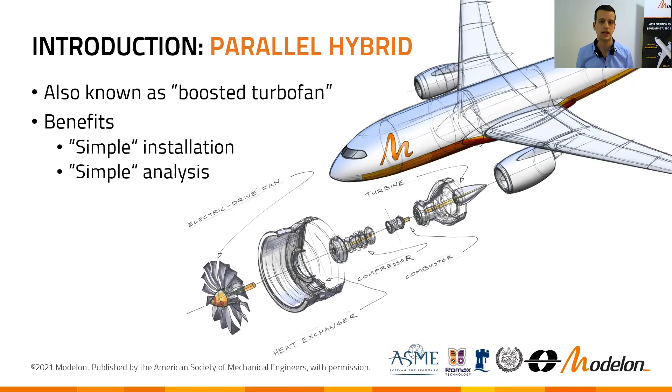The benefit is that the concept is still relatively simple in comparison to some of the other ones, and is therefore also relatively straightforward to analyze. Now, 4 variants were discussed in the literature of these parallel hybrids, and the first one here applies electric boost during the mission phases in which the aero engine must provide peak powers or peak thrust levels in relation to the cruise conditions. And these are the takeoff and to some extent also the climb conditions.

And in these cases, the hybrid system draws power from batteries on board the aircraft. And therefore, it's possible to downsize the thermodynamic core to yield some of the key benefits. And this is actually the most widely used concept of operations. Second, one could also apply electric boost during cruise. And some people see benefits in this, but there is also a lot of skepticism because of the weight of the required batteries. The third concept of operations shuts down the gas turbine core during taxi and spins the fan

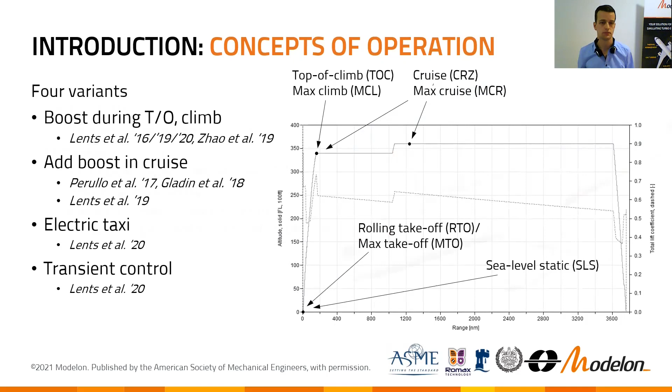with the electric machine. The fourth and last concept installs electric machines on both the high pressure and the low pressure spool and uses these for transient control, in particular to modulate the surge margin. And in the following, we will be focusing on the first option. So let's talk about the methodology then.

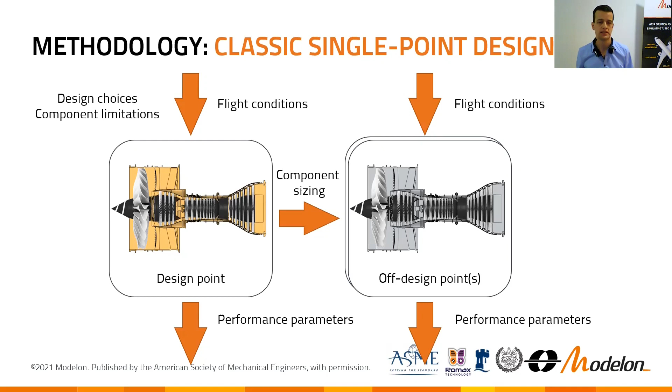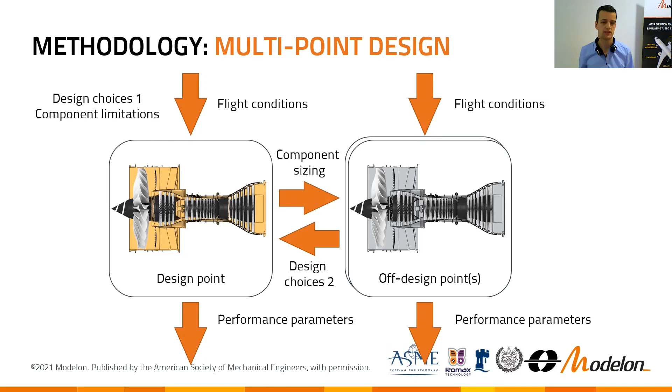This slide illustrates the classic single point design. And as most of you know, a single design point is used here to define the sizing of all the components. And then any number of off-design points are simulated to yield the performance estimates. Due to the limitations of the classic approach, we use multi-point design here. And in this case, design and operation rules allow off-design points also to be used to define the sizing on the design point. We therefore get this additional information flow from the right to the left. And it becomes possible to define some design choices based on key off-design points.

In this multi-point paradigm, we use the Kyprianidis and Zhao scheme. It's fairly unchanged. And to study the shaft speed, we vary the specific thrust of the hybrid. And this is a key cycle parameter for propulsive efficiency. And a low value typically goes hand in hand with a low fan pressure ratio and a high diameter fan that reduces the losses in the wake of the engine and therefore leads to more energy efficient designs.

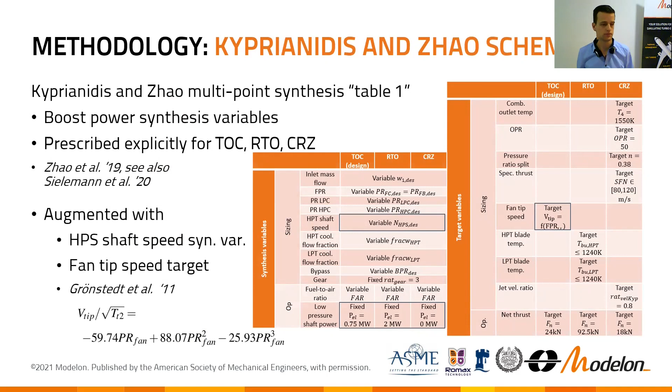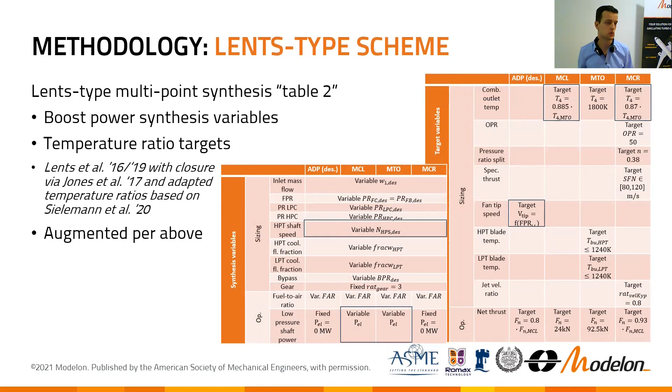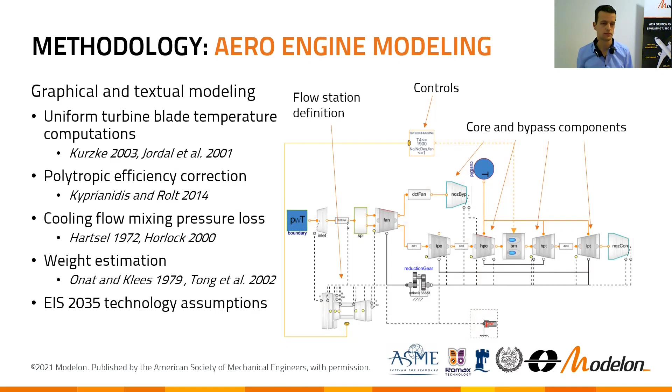When we're building multi-point design models, these models, as we just saw them, can be instantiated several times. Typically, that happens once for design and several times for off design. And these engine model instances are then connected to each other through additional utility models that contain the typical design and operation rules.

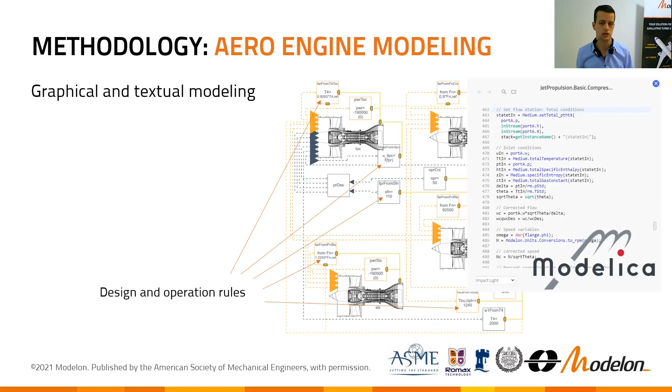Thanks to the standardized Modelica modeling language, all the graphical and textual representations of the model are always consistent. And we can also open up the code editor in the environment to read and change the code by hand anytime.

Now, if we want to yield an integrated simulation in design, we also must include some physical models of the electric power system. And these can be introduced through these placeholders. Behind that, we can have different variants. And by replacing the placeholder with a particular variant, we drop in just the right model detail. In this case, the electric machine, the cables, the inverter, batteries, and so on.

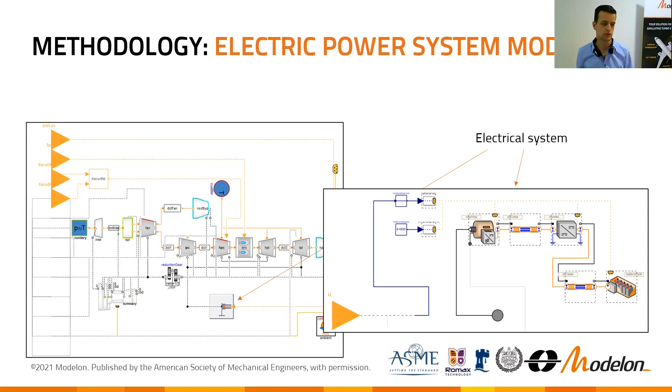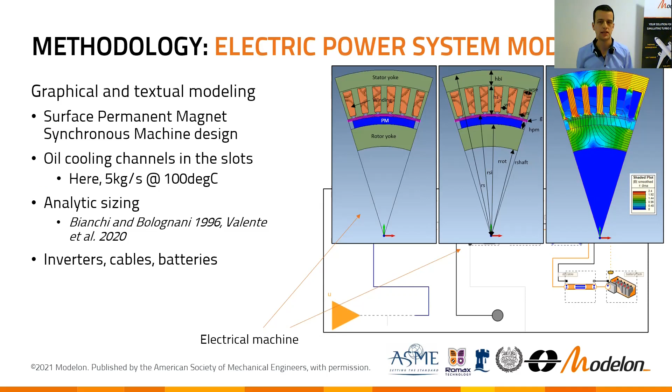Lastly, we can also review some of the geometric dimensions used in the analytic design procedure for the electric machine. And as you can see here, we assume a permanent magnet synchronous machine design and a certain constant cooling flow in terms of oil, 5 kilograms per second across all the designs that we're looking at. And the references on the slide provide some more detail on this analytic sizing procedure that I mentioned.

All the computations were run in Modelon Impact, the system simulation platform that offers multiple views and means to access modeling and simulation. And on the slide to the left, you see the graphical desktop with your drag and drop functionality and these custom functions or microscripts that can be used to automate workflows interactively.

In the middle, you see the notebook interface in which you can mix code, text, graphics, outputs, plots, etc., to build up sophisticated analyses and workflows. And to the right, you see your custom web apps and browser-based dashboards providing interfaces to sophisticated simulation. And in this work, we use the two views shown to the left.

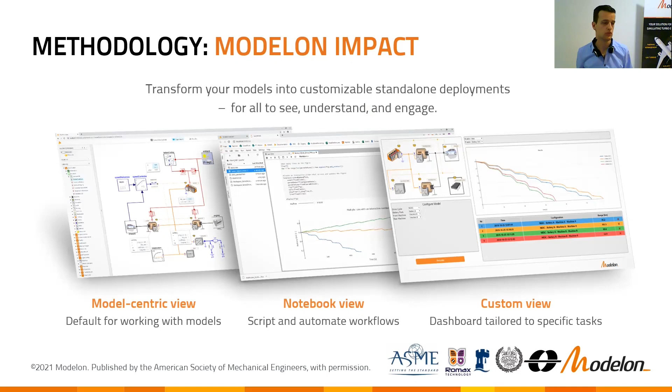Now, these views allowed us to create a customizable workflow covering this drag and drop interface to build the normal single point plant model. That also allows us to save and name single point simulation results, which also can be used to automatically generate a stub for the multi-point model from which we expand and graphically create the complete multi-point setup.

And that also gives us support to reuse the saved and named single point simulation results to initialize the model the first time you run it. And lastly, we use the interactively built and converged multi-point model in these analysis notebooks.

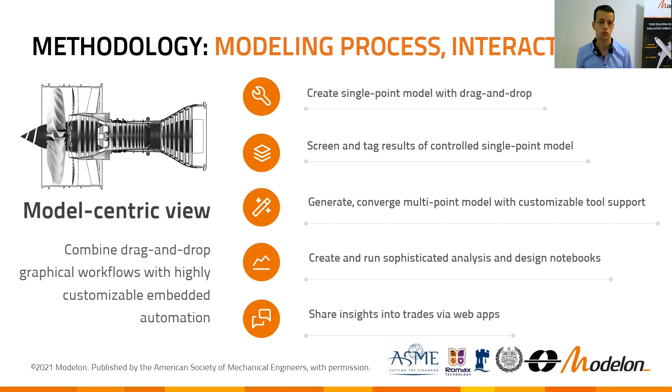Here is an example of step 3, where we converge the multi-point model. We reuse these tagged single point results as guesses, and we have to define a mapping between the names of the results and the names of the submodel instances, as you see here on the screen.

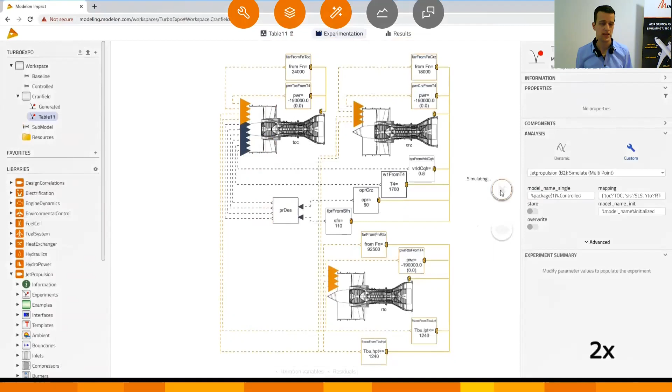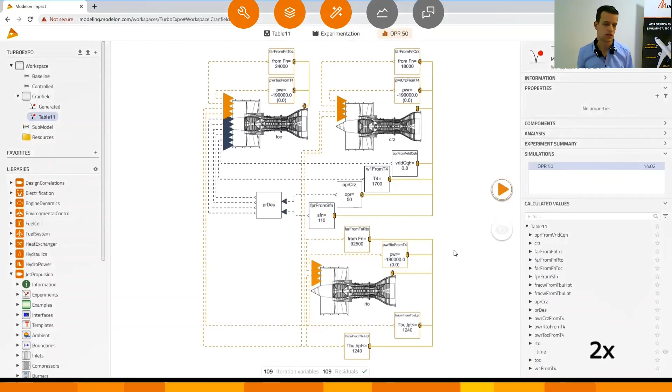And then we switch on saving the results into another initialized model as a separate experiment and run the multi-point simulation, and of course come up with a meaningful name such as the OPR 50 that you see here.

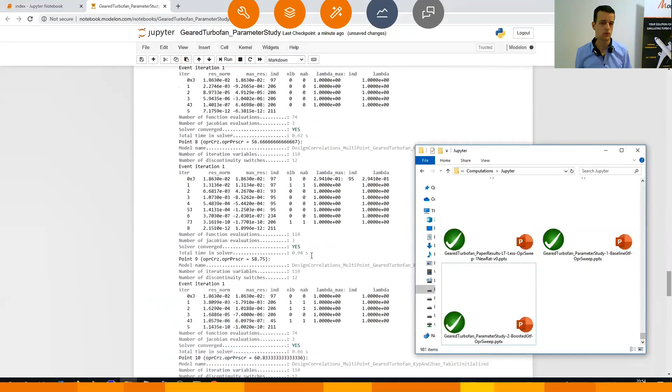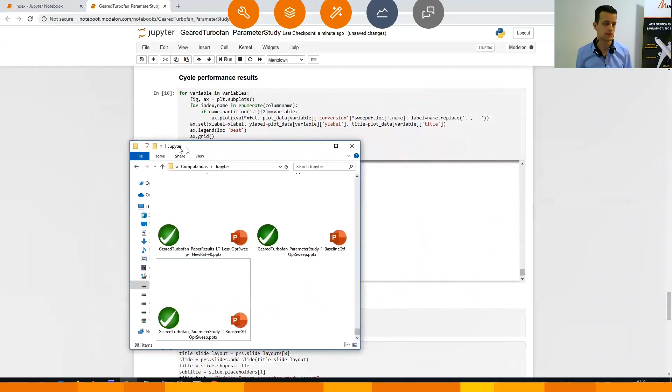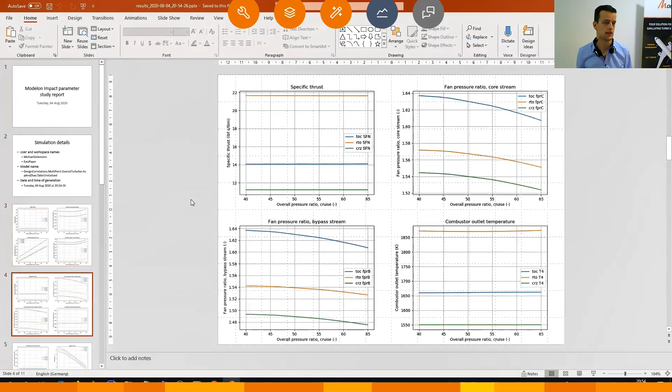An example of step 4 with an analysis notebook. Here we use the same on-premise server-based infrastructure and run a workflow with batch analyses where we dump results into a slideshow presentation. So you will see the plots popping up first in the notebook and then in your slideshow file.

So let's move on to the results. Here are some typical cycle performance results. Here we're using color coding for the different cases. And when we have roughly the same case, independently of how we call it in a given scheme, we color it with the same color. So for instance, your orange is rolling takeoff and max takeoff.

And the line style refers to the different multi-point schemes. So for instance, you got your dotted lines for table 1, which is the Kyprianidis and Zhao multi-point scheme, and your solid lines for table 2, which was the Lents type synthesis.

And what are we really getting? So first, for the conventional and hybrid Cranfield type designs, we get this expected specific fuel consumption improvement. We also see that bypass ratio increases mildly. And for the conventional and hybrid NASA Glenn type designs, so including the Lents type scheme, we also get some expected specific fuel consumption improvements.

The bypass ratio here also reduces quite a bit, but it's also already on a very high level. By design, the overall pressure ratio is not changing. That was contained in how we built the multi-point synthesis schemes.

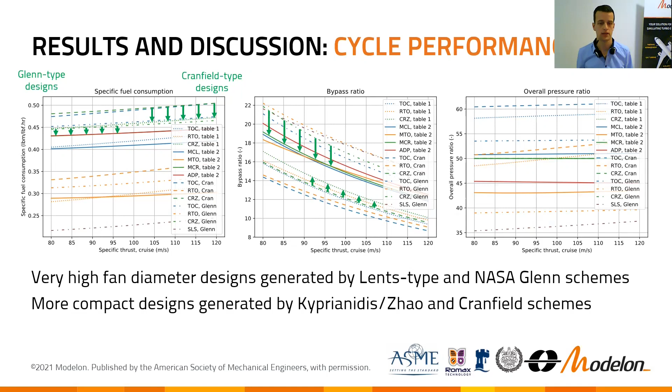So here you see different machine installation options. If we start from the left, we see how the machine could be installed inside the intermediate pressure compressor. And then we actually assume that it can only be connected to the low pressure turbine side of the fan gearbox.

Alternatively, and you can see this in the middle and on the right, it could be installed inside the spinner. And there we assume that it could be connected either to the low pressure turbine side, or the fan side of the fan gearbox. And that's what you see in the middle and to the right, respectively.

Now, if we review the different flow paths for different values of the specific thrust, we see that as we go to lower values of the specific thrust, the speed is reduced while we maintain essentially constant power. So we have to generate more torque, and the machine lengths, they increase quite a bit.

At the bottom, we see machine efficiency and rolling takeoff. Now here the legend corresponds to the flow paths that you see to the top from right to left. So your spinner at fan installation shown to the right uses your dotted line. The spinner at the low pressure turbine in the middle uses the solid line, and the intermediate pressure compressor at the low pressure turbine shown on the left uses your dashed line.

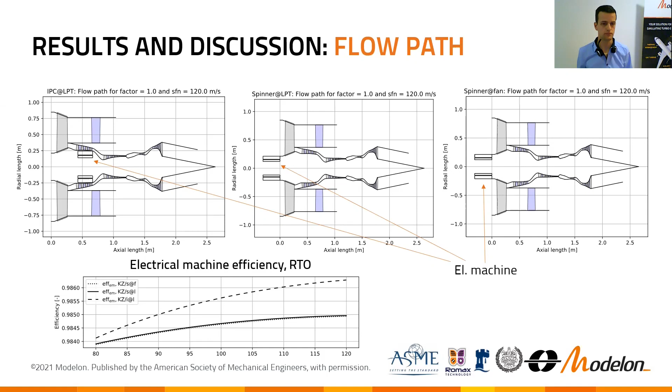Now the internals of the gas turbine core are obviously not at all empty. They're really filled with disks, frames, subsystems. Therefore, it might actually not be possible to accommodate the electric machine within the turbomachineries up to exactly the hub radius. So we additionally applied some factors on the hub radius to come up with smaller installation spaces.

And from the left to the right, you see a factor of 1, so 100% of the hub radius being available for the machine, 0.8, so 80% of the hub radius being available, and 0.6 or 60% being available for the machine. And we see that some fairly long machines result if we have to reduce the diameter of the electric machine.

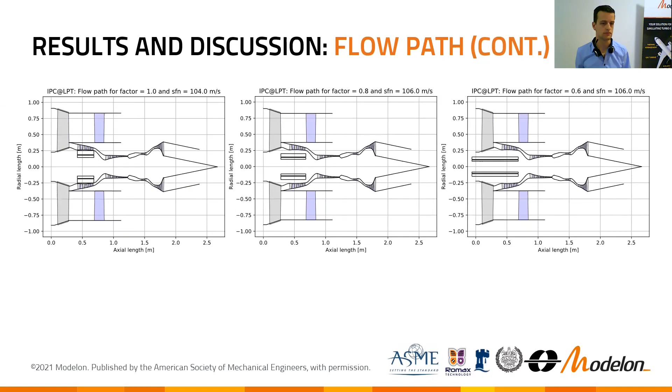In terms of the component masses, we also have some interesting results. We see that most of them increase as we go to very low specific thrust values. There are actually 2 exceptions with our assumptions, the low pressure turbine and the intermediate pressure compressor. And due to the absolute value, we focus on the low pressure turbine here.

Now we know that for direct drive engines, the low pressure turbine mass typically increases with a reduction of specific thrust. Now we also have to recall that this is a geared hybrid. Recalling a geared turbofan, this suffers less from the underlying implications, and you can see the details in the paper, because the turbine rotates much faster and therefore can keep the number of stages longer across a given range of specific thrust values.

So what we're seeing here really is that this weight reduction for the low pressure turbine is really due to us not having to increase the number of stages across this range of parameter values that we're covering with the sweep.

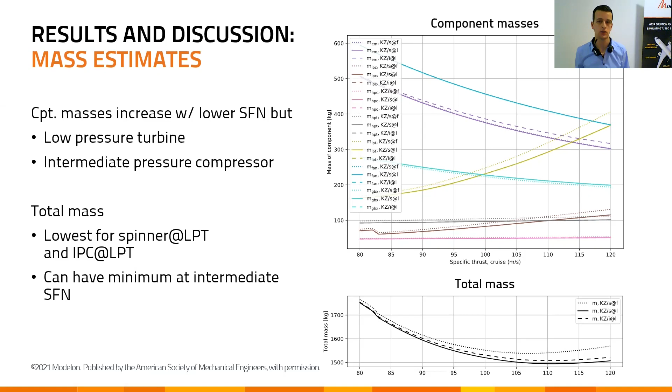In terms of the total masses, we see that there can be a minimum at some intermediate specific thrust values, and the values are lowest for the spinner at low pressure turbine installation option and the intermediate pressure compressor at low pressure turbine installation option.

Now, with all the assumptions we made and the analysis, the installation inside the intermediate pressure compressor comes out advantageously, with the exception of the integration issues. Now, if we choose to mount the machine inside the spinner, then actually mass might be a decisive factor, less so the efficiency.

And concerning the design trade-offs that we identified, we can note that concerning this shaft speed trade-off that is in the title of our contribution here, the gas turbine essentially behaves as we would expect it. As we go to lower shaft speed and specific thrust, it becomes more efficient. Now, the electric machine can actually have the opposite trend. We also saw that the reduction in radial space for the electric machine can be quite costly in terms of the length and therefore also the mass of the electric machine.

We also saw that the Lents type, or more generally the Glenn type designs, actually look fairly advantageous from the instantaneous specific fuel consumption values, but the designs use fairly large fans, and the nacelle weight and drag should really be taken into account. They were not studied here. And these designs also become less efficient if we throttle them to the correct cruise levels.